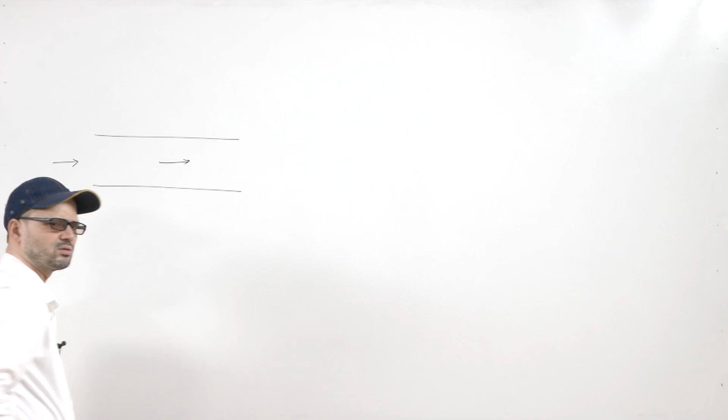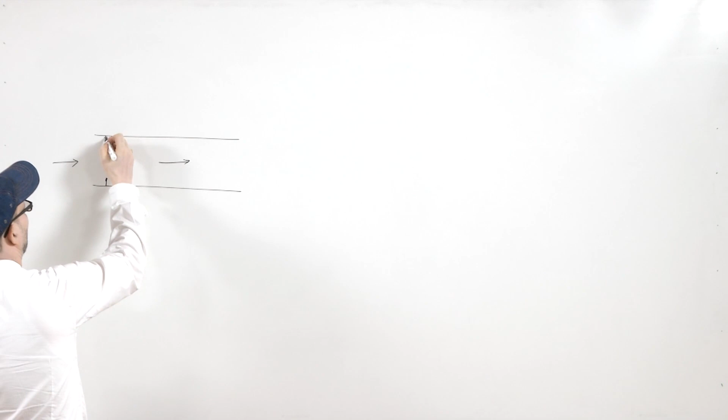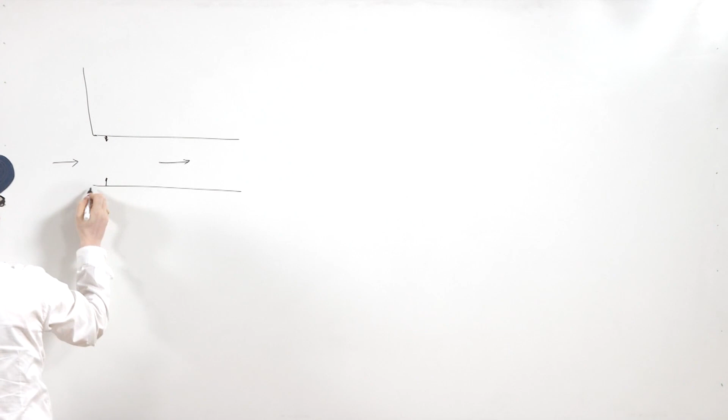Now, how does it happen? Suppose you have a channel and you are pouring the liquid metal into it, and the liquid metal goes all throughout. In the case of pure metals, with time the solidification will start at this surface as well as at this surface. The advancing front will grow in both directions. Now, the liquid metal has a certain head, so suppose it is connected from here and the liquid metal is coming from this side, so that will go in this direction.

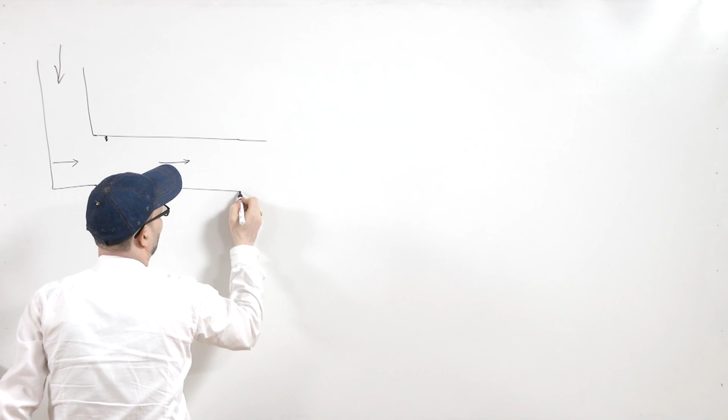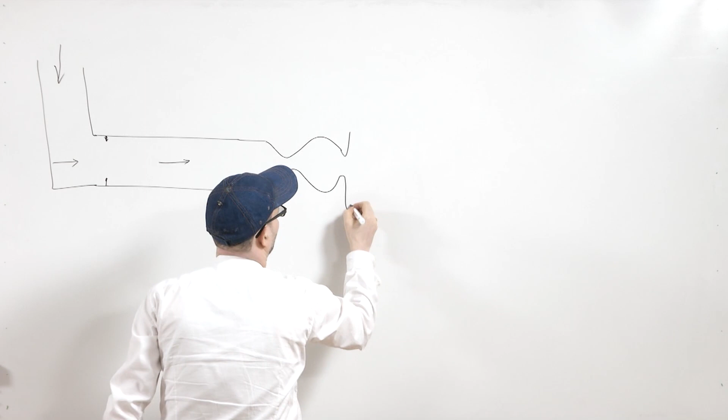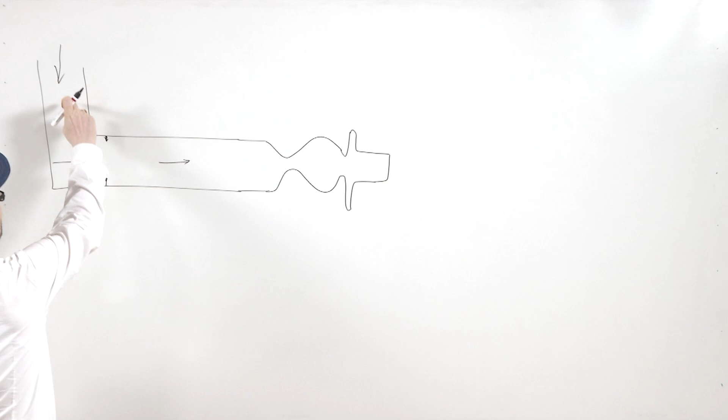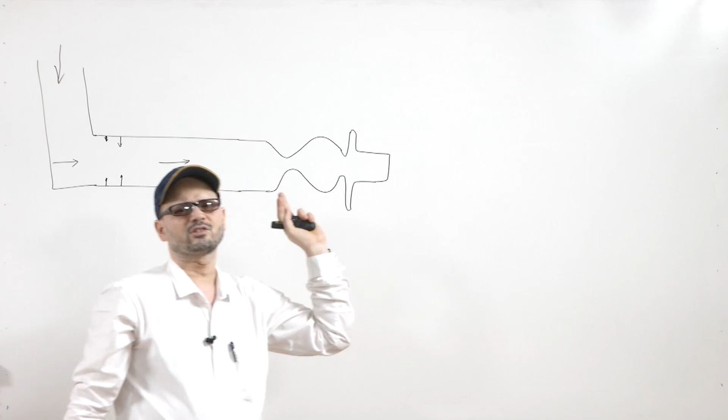As it goes along this direction, suppose in the way you have different kinds of projections. It may be like that. When the liquid metal goes through this, it will experience certain resistance, maybe because of the mold walls. Now, the ease with which it goes into this cavity, fills these portions, and maybe extends further into some other geometry, matters. It will go on moving, but the solidification front will move from here and here. If the channel is infinitely long, after some time you will see that it will be blocked, because the advancing front will come and ultimately block it.

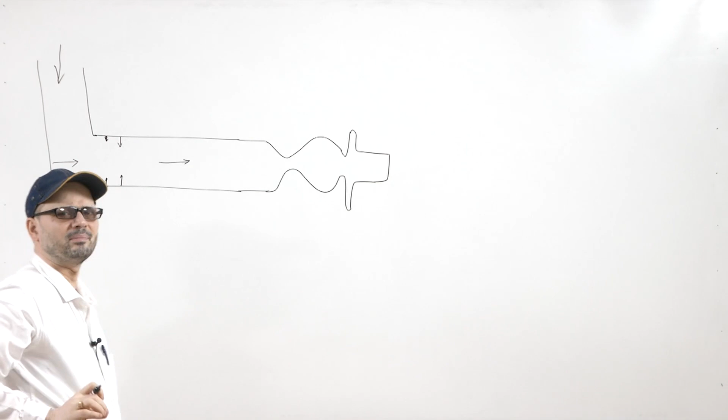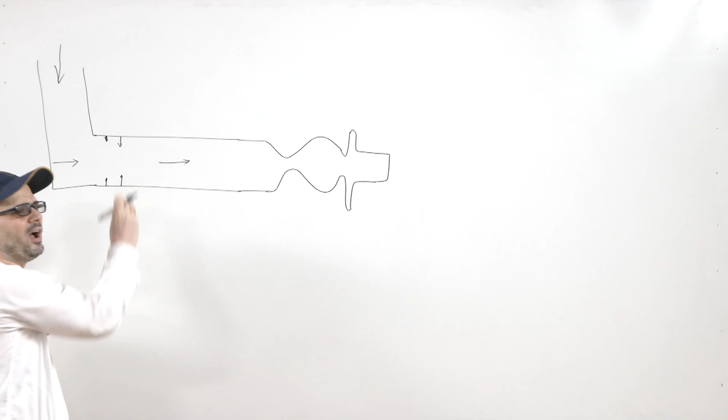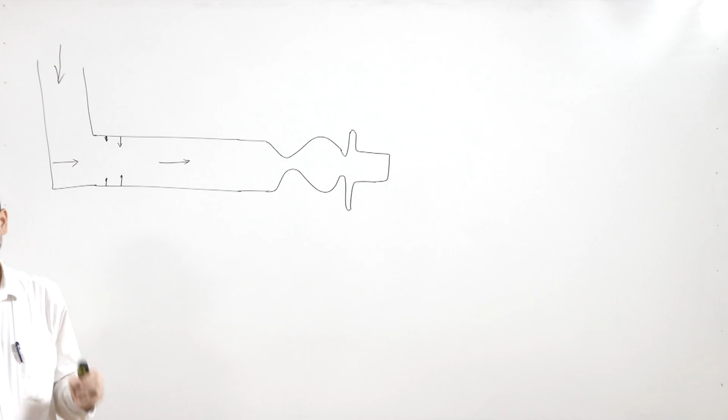So, the care which a foundry man has to take is about the time during which this advancing front from both sides comes and joins and closes this channel, so that there is no further entry of liquid metal. All the liquid must go into the cavity, otherwise this will be blocked. For that, the metal has to have enough fluidity. If the metal becomes solid, there will not be any further entry, because the channel will be blocked. So, you must have a fluid life for that metal.

If the fluid life of the metal is high, then even if it takes a little more time, you can ensure that the liquid metal will move and fill all the details of the casting. So, that is why fluidity is important. Maybe you have studied different types of casting defects in earlier classes, and many are related to improper fluidity of the liquid material. What happens if the liquid metal is not able to go to the distance where it should go?

In that case there may be defects like misrun, because it may not fill the whole cavity. As we know, there are many factors which control this fluidity.

So, it is not a single physical property, because it will depend upon many factors. As we discussed, when we pour the liquid metal into the mold, it will depend on the temperature of the liquid metal. Normally, when the temperature of the liquid metal is higher, the fluidity will be higher, because if you have given large superheat to the liquid metal, first of all the liquid metal loses its superheat. Then after losing its superheat, it comes to its freezing temperature.

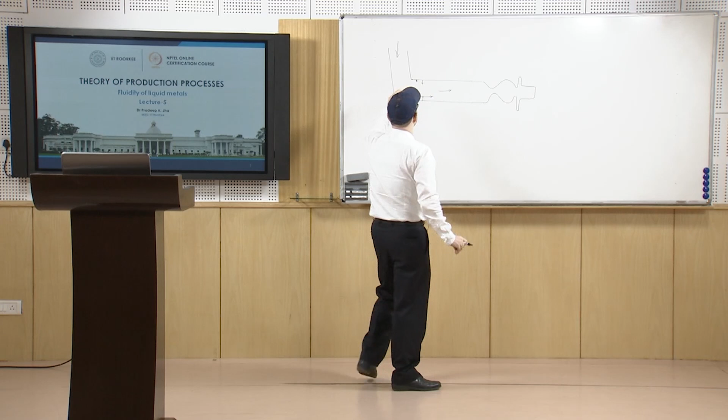If the design of the gating system is not proper, the flow will not be streamlined. There may be corners where there will be pressure differentials, points which will have pressure pockets, and those also affect the fluidity. There are many properties, and we will discuss how they are important. Fluidity is very important for liquid metals to be studied, so that you ensure the metal fills all the intricate details of the casting.

Factors affecting fluidity. As we discussed, you have a number of factors which affect the fluidity. These include inherent properties of the liquid metal, like surface tension. If the surface tension is higher or lower, it will affect the fluidity of the material, because it is a force which is working. Based on that definition, it will be clear how it affects the fluidity. Surface oxide films also affect the fluidity. Gas content, suspended inclusions, mode of solidification, crystallization: all these are inherent properties of the liquid metal.

When you cast any metal, it will have certain surface tension properties, it will have properties on whether it makes oxide films, and a certain gas content, because at higher temperature large amounts of gases are dissolved into the liquid metal. That will affect the fluidity. Similarly, you have inclusions suspended in the liquid metal, and the mode of solidification. These are the factors which affect the fluidity.

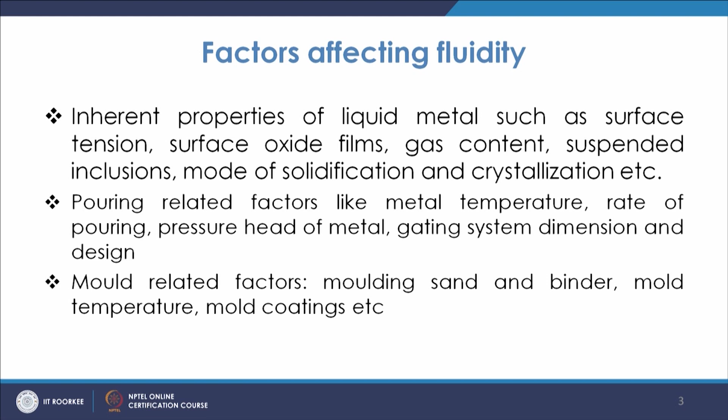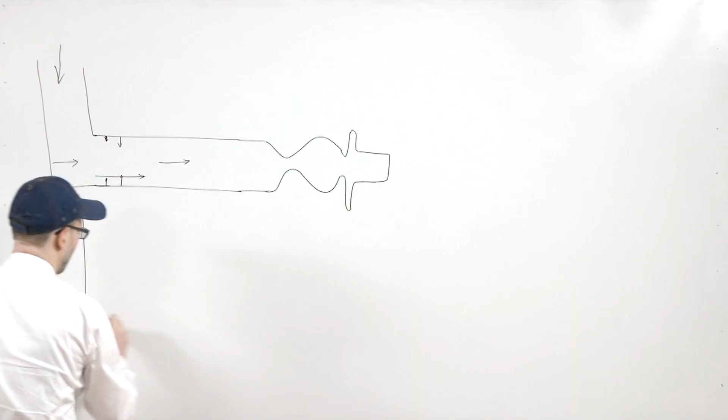So, let us go to the factors. First of all, the temperature is the most important factor which affects the fluidity. If the temperature is higher, the fluidity will be higher, as we discussed. For different materials you have different kinds of fluidity graphs.

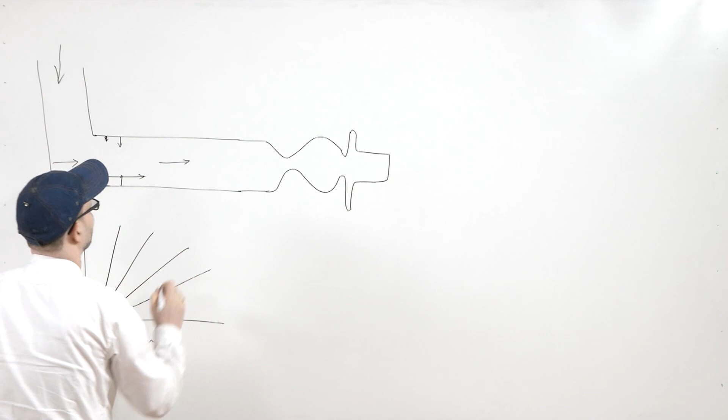We will discuss how fluidity is measured. Basically, fluidity is measured by some length or distance, maybe in inches or centimeters, and it is quantified in terms of the distance which the liquid metal traverses in a spiral test.

Normally a spiral fluidity test is carried out, that we will discuss. In that, what we do is we give the liquid metal at one portion, and then the liquid metal is allowed to go along the spiral case, and it is seen how far it is traversing along the spiral path. The distance which it traverses, measured in inches, is termed fluidity.

So, if the fluidity is higher, the metal will be able to go up to a larger distance. The temperature is the most important factor affecting fluidity. If the temperature becomes smaller, then fluidity will be smaller. In most cases, when the liquid metal is losing heat while traversing through the mold or through the gating system, as the temperature comes down, the fluidity will be smaller and smaller. So, if you maintain some more superheat, or if the temperature is higher, the fluidity will always be higher. That way temperature is one of the most important factors which affects the fluidity.

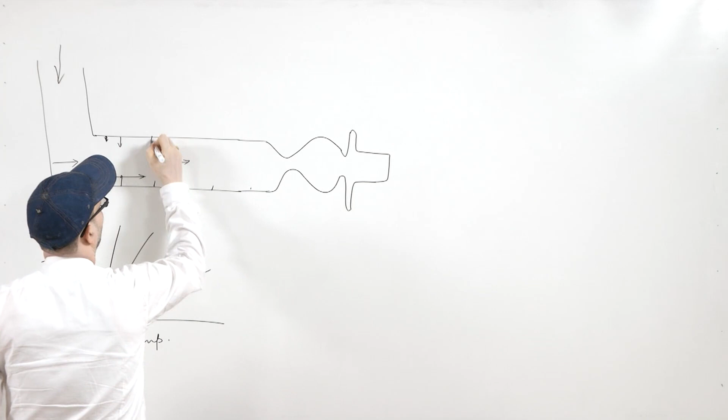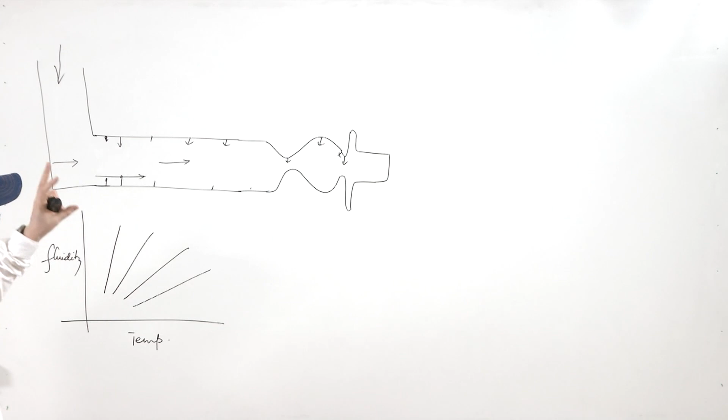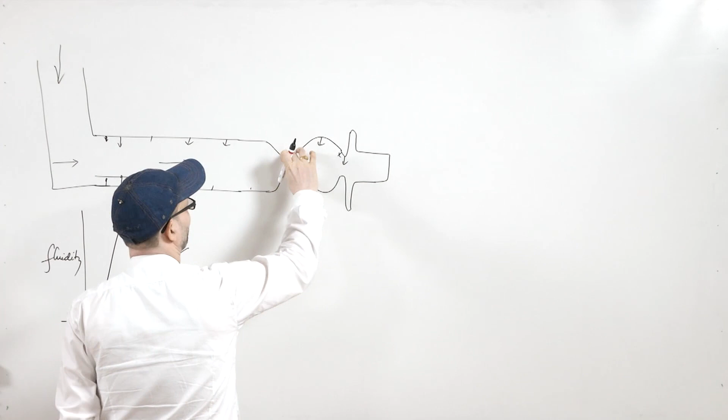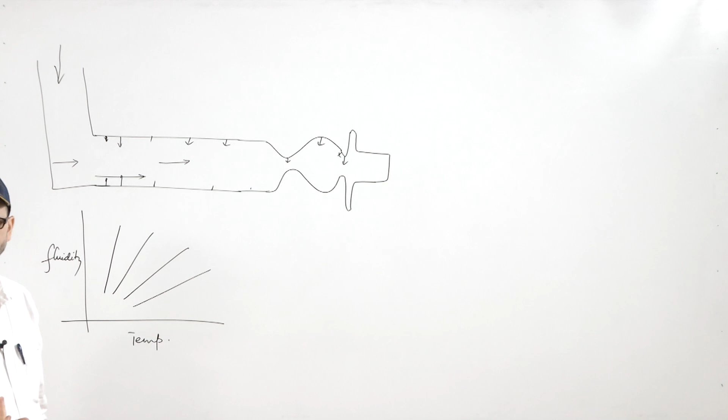The thing is that when the solidification has to start, you should ensure that your whole cavity is filled. Somewhere, you know, the solidification will start from this place as well as from this place as well as from this place. At all these places the solidification will start. Now, if you look at this cavity, you have to ensure that this portion should not get solidified. If this gets solidified before the metal enters all the portions, then this part will not be filled and it will be a defect. So, when it enters into the cavity, it should go quickly and fill the cavities. For that, if the fluidity is higher and the temperature is quite high, you will have confidence that your metal will not solidify here and choke.

So, for that, one is temperature. The second thing is that even if the temperature is higher, but if you are pouring in a very slow manner, then the temperature will come down. So, pouring must be fast, so that in less time it goes and fills the cavity, and once it fills the cavity, then the cavity will be solidified. Then there is not much of a problem. So, for that rapid rate of mold filling is required, which will improve the fluidity. So, for good fluidity, the metal head should be increased.

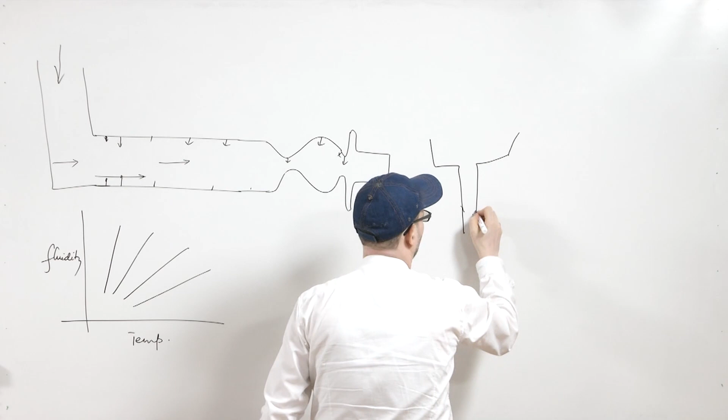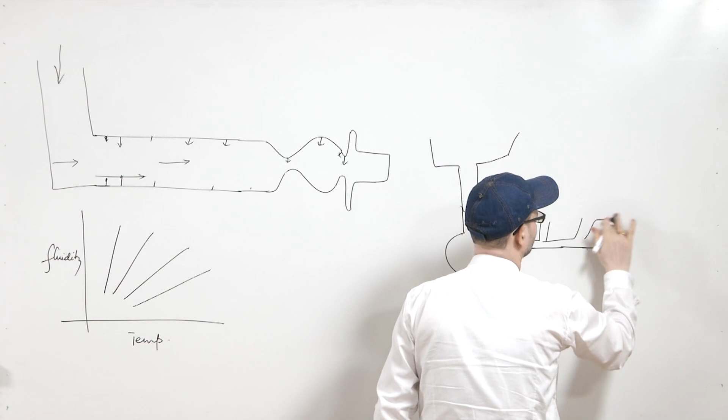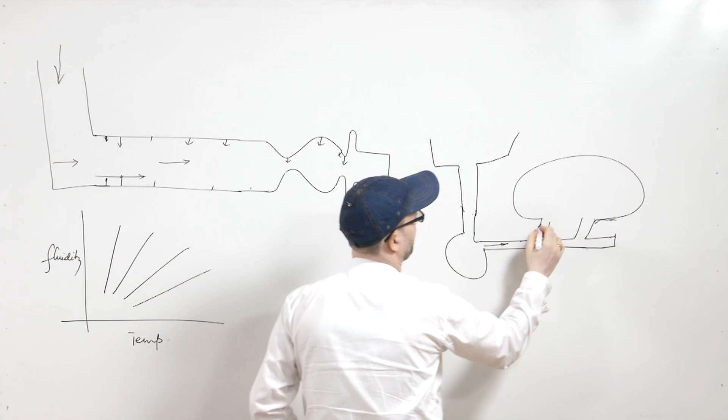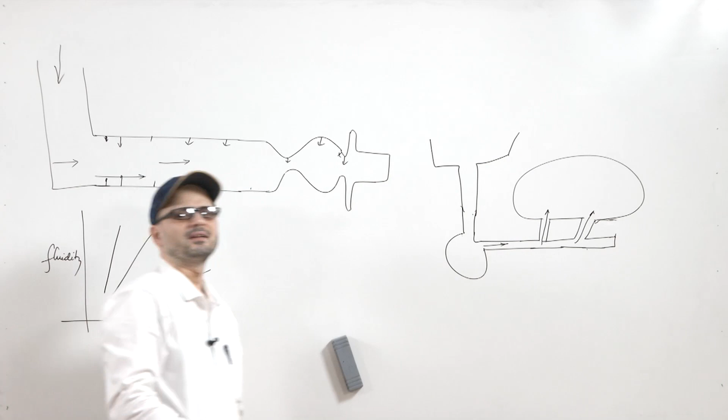Gating system should be designed to minimize frictional and energy losses. We will discuss the gating system, and you must have heard about it in the early courses of manufacturing processes. The gating system basically consists of a network. You have the pouring basin, and then it will come to a sprue well, and then from here it will go to the runners, and then it will go into the cavities. So, like that. You will have the cavity. Now, in the gating system, you will have these entry points, and then it will go into the cavity. The thing is that the gating system is very important.

The flow is basically fluid flow. The liquid metal is flowing through the channel, and at every point on the surface you have energy losses, you have frictional losses, and you must minimize them, because of these frictional losses the velocity will be decreased. If the velocity is decreased, the rate of pouring will be affected, because if the velocity becomes small and the area is the same, pouring will be affected, because pouring rate is area into velocity. So, that depends upon the frictional losses. These frictional losses will depend upon the type of mold surface. So, this surface must be made smoother, so that you have minimum friction.

Minimum frictional loss. For that, basically we use the surface in such a manner that you have minimum friction. Like if it is sand grain, you should use the mold wash, you should use the fine grain sand so that you have minimum frictional losses. Similarly, you have energy losses. You may see at many points you have abrupt section changes.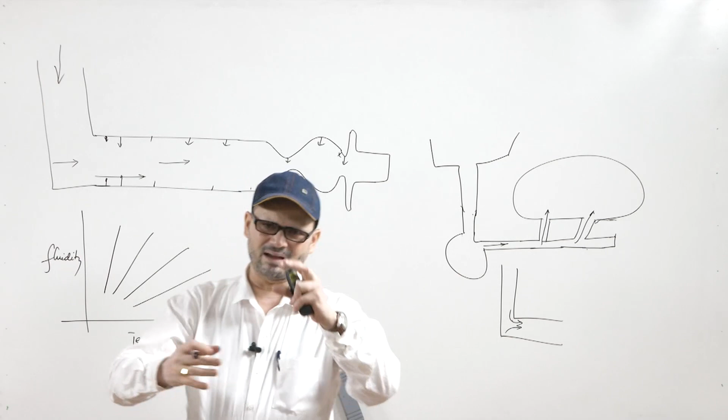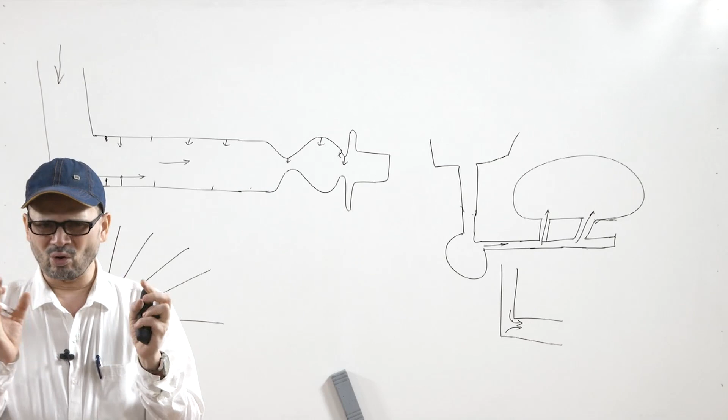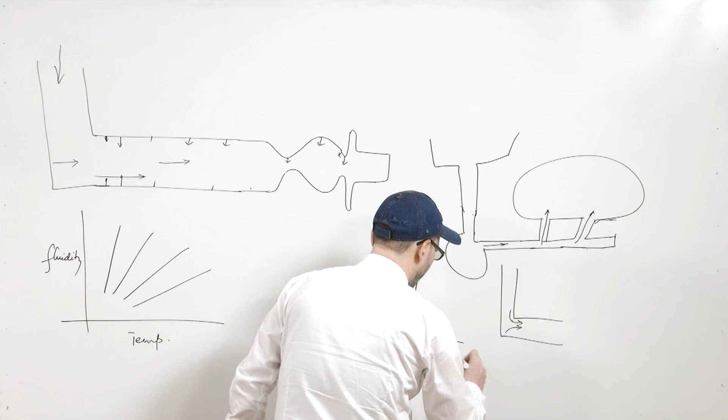Whenever you have abrupt section changes, you will have the formation of vena contracta, and the formation of zones where there will be adverse pressure gradient. At these places or at these bends, if you have more and more bends, you have energy losses. So, you should see that there is a minimum number of bends, or even if there is a bend, you should have streamlining. For that you should do these design changes. That will basically reduce the energy losses.

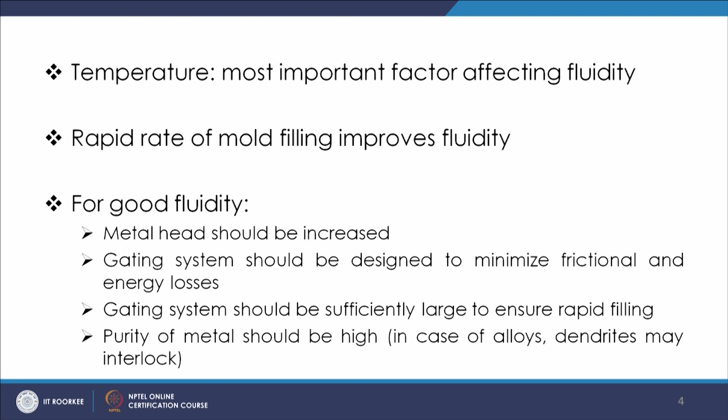Once the energy loss is less and the frictional amount is less, the fluidity can be maintained at a higher value, and you can ensure that in a certain time the liquid metal will fill the cavity. Second point is that the gating system should be sufficiently large to ensure rapid filling. So, you must have sufficient large capacity so that you ensure the rapid filling. Purity of metal should be high. What happens is that in one case the metal is pure, in another case it is not pure. If the purity is not high, the fluidity is also affected.

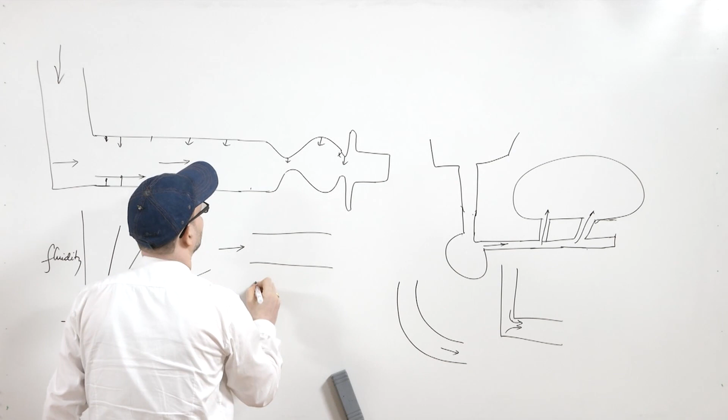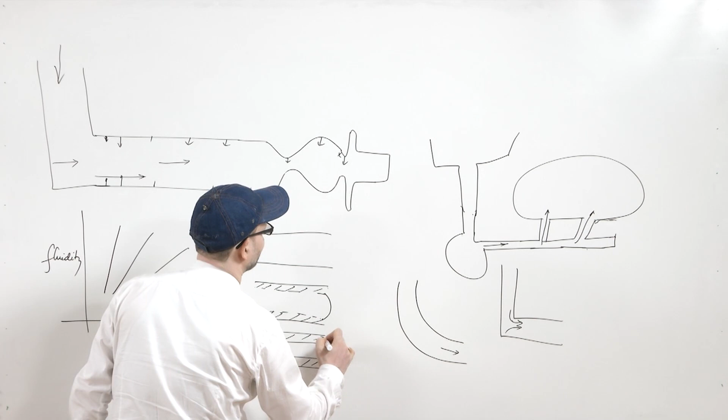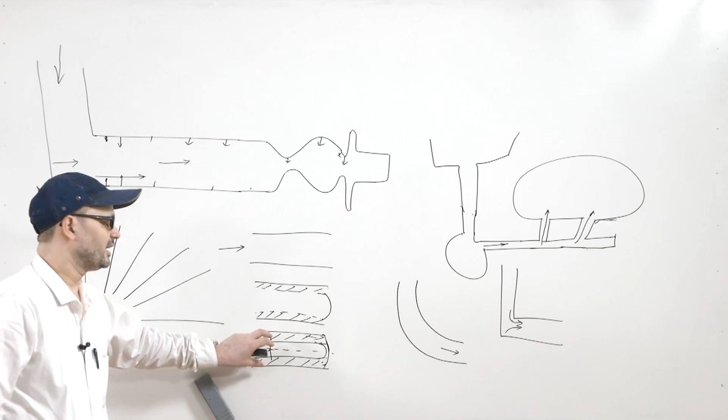In case of pure metals, as you know, the freezing is by advancing front, because you have plane front solidification. What will happen if you have the channel and the liquid metal comes? Slowly after some time the surfaces here and here will be solidified, and then further you will have this and this. So this portion is solidified, this portion is solidified, and your advancing front moves like that. When both are matching at this point, the channel is choked. So that way it will stop.

Whereas, when you have the dendritic structure, there may be dendritic interlocking, and the dendritic interlocking will affect the fluidity. It will, in some sense, break the movement of the liquid metal, because the dendritic arms may interlock, and that will affect the velocity of the liquid metal. Here you have smooth flow of liquid metal through these passages, but if you have dendritic formation in the region ahead of this front, as we discussed in the case of constitutional undercooling, that will be a resistance in the path of liquid flow. So, that affects the fluidity. Fluidity becomes less.

Other factors like mold related factors we discussed earlier, that you have molding sand and binder. The molding sand which is used must be fine sand, which decreases the resistance and gives less resistance to the metal which is flowing. Similarly, sometimes we give the mold wash, so that you have a smooth surface on the molding sand which is in contact with the liquid metal, and that provides less resistance to the metal. Then you have mold temperature, as we discussed. Most of the superheat is arrested when the liquid metal touches the mold, and the mold is normally at room temperature.

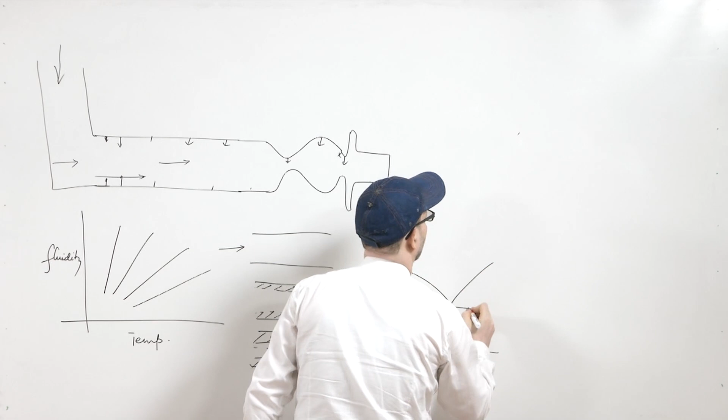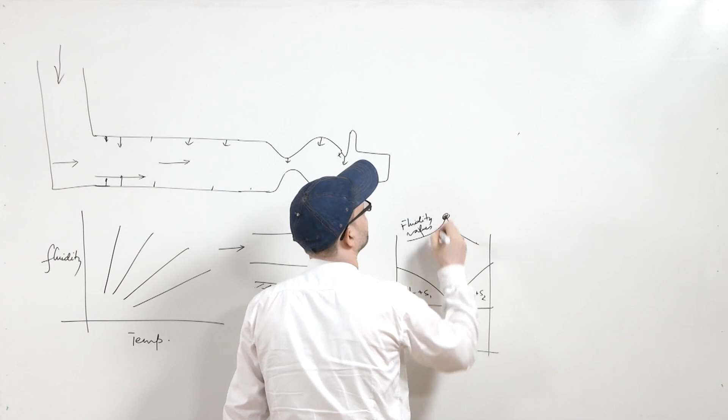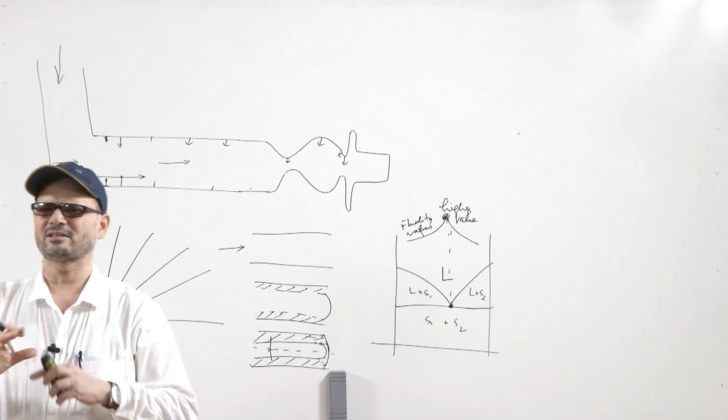It has been seen that metals which solidify at a constant temperature, either pure metals or metals with eutectic composition, have higher fluidity. So, when the fluidity test was carried out, if suppose you have a two phase diagram like this, this is known as the eutectic point, where this is liquid, this is liquid plus solid 1, liquid plus solid 2, and this is solid 1 plus solid 2. In that case, the fluidity will be higher at this point of eutectics. That is why in case of such metals you will have larger fluidity.

When you have a freezing range of material, the fluidity will be affected. That is normally seen, and that is why we say that it is difficult to feed. We discussed the CFR or the feeding resistance. It has something to do with that kind of structure, because for those materials which have large freezing ranges, because of the dendritic structure formation, the movement of the liquid metal to the different portions is obstructed, and that is how it affects the fluidity of the material. So, that is why the composition will affect the fluidity.

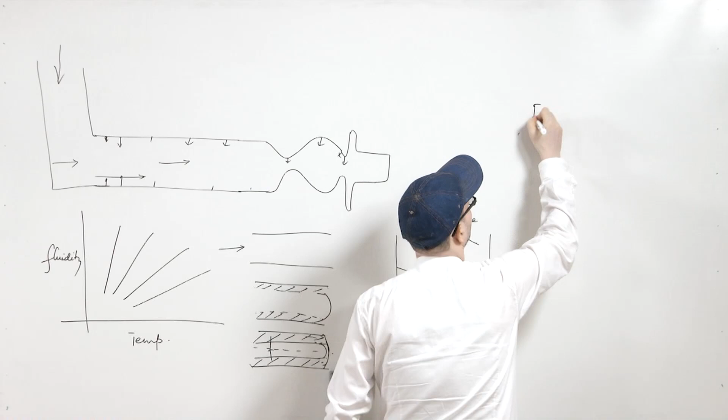Now, let us see the fluidity test. You have a standard fluidity test which is carried out. Fluidity test is the test which tells what the fluidity is. It is quantified in terms of the distance up to which the liquid metal moves. There were different tests, like a straight channel and other types of channels, but the most popular among these is the spiral fluidity test.

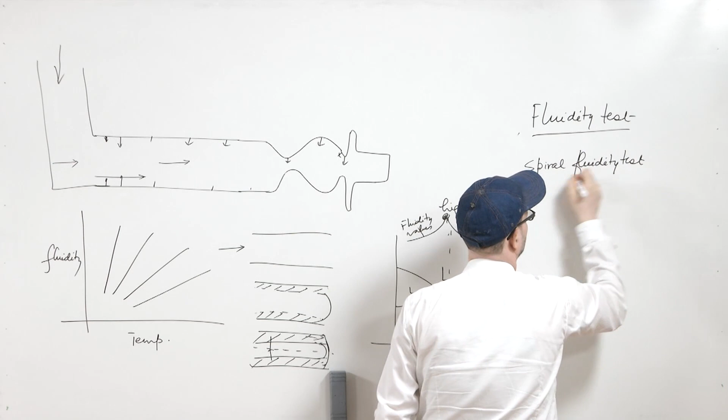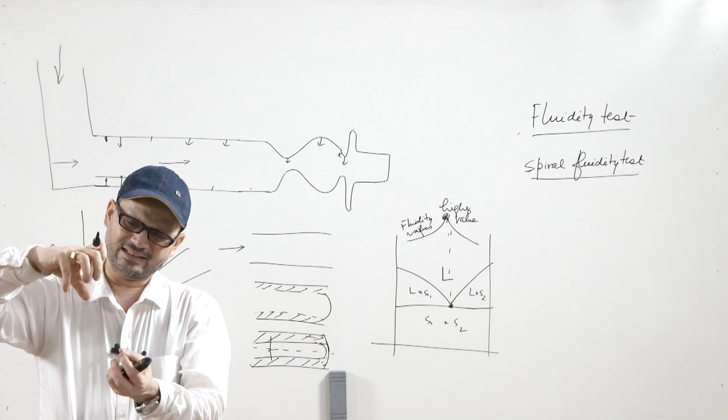In the spiral fluidity test, you have a spiral type of geometry with a certain cross section, and then liquid metal is poured. Because the temperature is higher, the liquid metal will go along this spiral path, and it is seen how far it traverses. Depending upon the distance it traverses, that is said to be the fluidity of the material. So, the test looks like this. Here is a typical fluidity test, known as the spiral test.

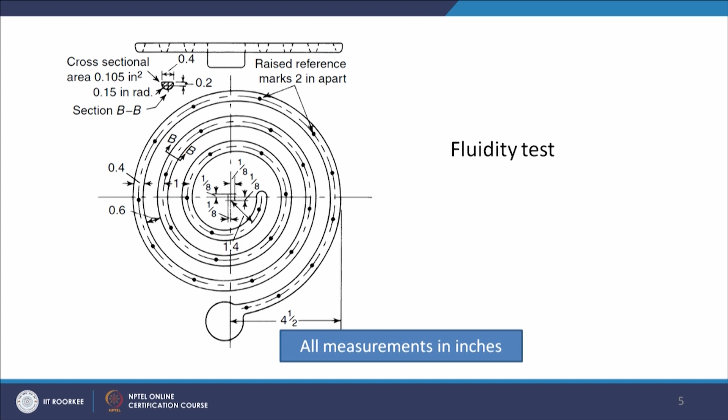If you can see here, this is the cross section at this section, with 0.4 inches, which will be something close to 10 millimeter, and accordingly you have different dimensions and different points marked here. Liquid metal will move to different places, and it is to be seen how much distance it covers under the standard condition that is set. If it traverses a larger distance, it means the fluidity is quite high. If it traverses a small distance, it means the fluidity of the liquid metal is low.

Again, the fluidity depends upon many factors, as we discussed, like the compositional factors, the surface tension properties, and whether it has a surface oxide film. There are different kinds of properties which drive this property, and based on that you can ascertain the fluidity. When you cast any material, you can do the fluidity test and see whether you have adequate fluidity. Once you do, you can ensure that when the liquid metal is poured into the cavity at a particular temperature, it will go into all the corners and fill all the details of the cavity. So, this is how the fluidity test is carried out. Thank you very much.